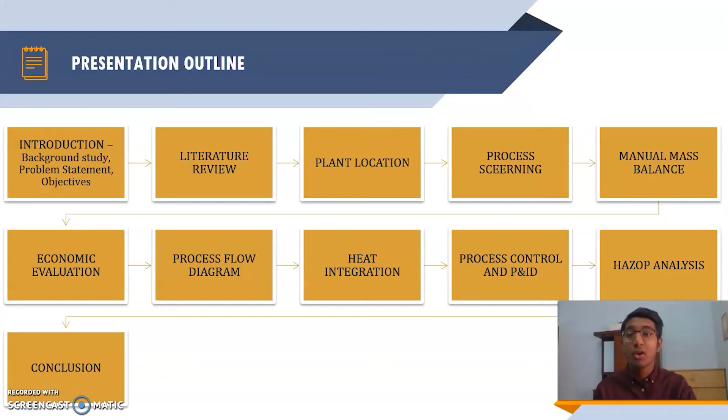Moving on, the title given to us was Title 1: Plant Design for Monetization of Plastic Waste for Chemicals Production. Now moving on to the introduction of this project.

Based on the background study, plastic was produced to reduce the burden of many parties. However, most plastics are not biodegradable. Many companies and industries produce biodegradable plastics, but in general, plastics are still considered non-biodegradable. Due to this, research has been done whereby we can thermochemically convert this plastic waste into commercialized fuel.

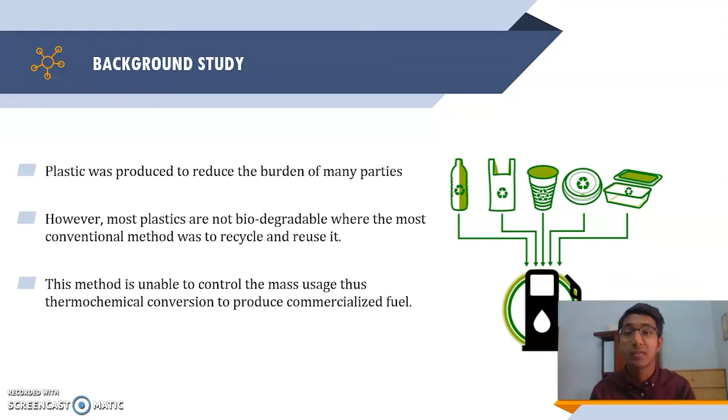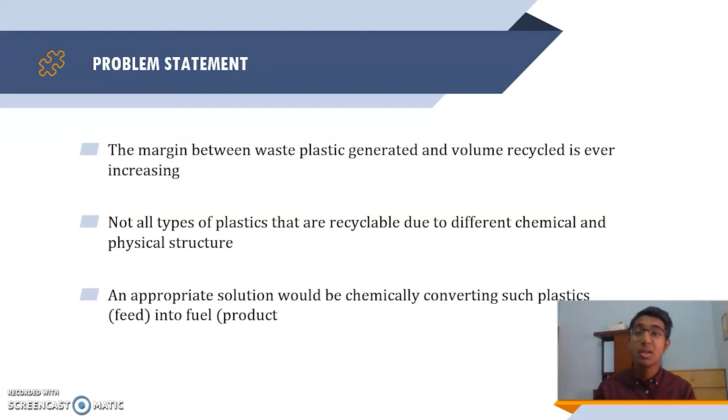Based on our problem statement, the margin between waste plastic generated and the volume recycled is ever increasing. Development in the industry has caused various types of plastics to be produced, with different chemical and physical structures. Due to this, we cannot recycle all types of plastic. Thus, converting plastic into fuel seems like an appropriate solution to this crisis.

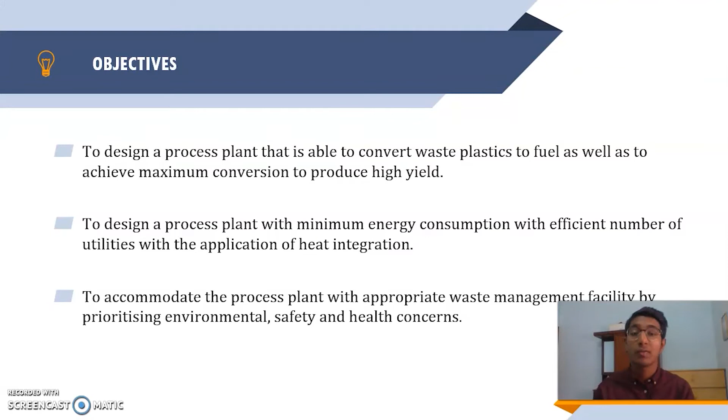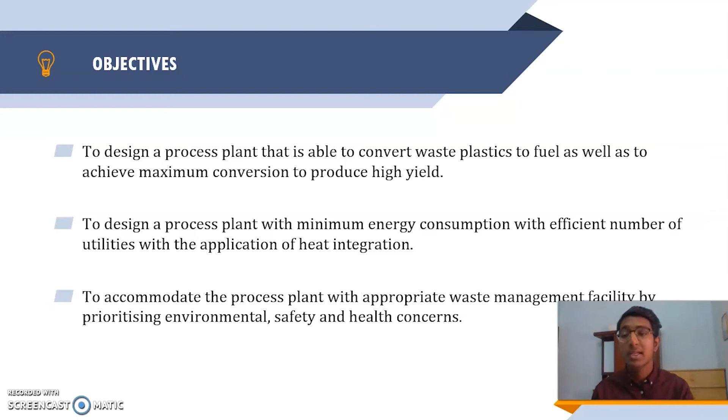The objectives of this project are to design a process plant that is able to convert waste plastics to fuel, as well as to achieve maximum conversion to produce high yield, and also to design a process plant with minimum energy consumption with efficient number of utilities through the application of heat integration, and lastly to accommodate the process plant with appropriate waste management facility by prioritizing environmental, safety and health concerns.

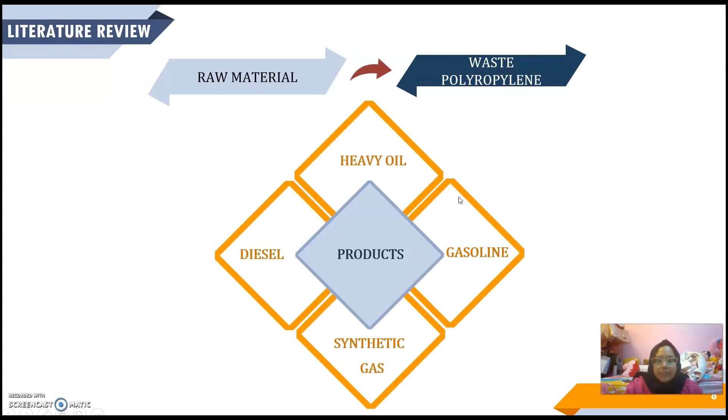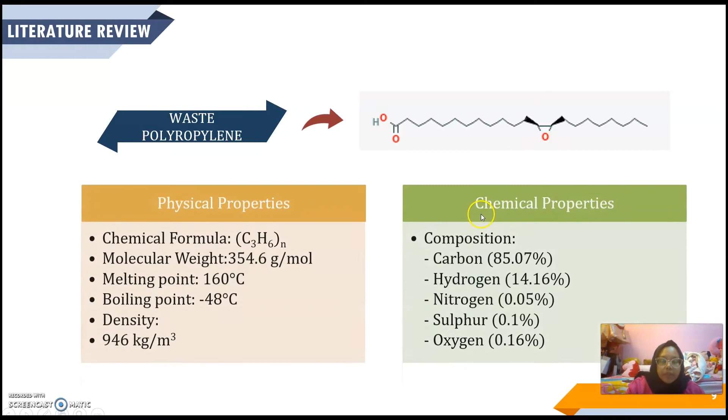I'm Akila. I'm going to present the literature review. The raw material of our pyrolysis plant is waste polypropylene, and the main products are diesel, gasoline, heavy oil, and synthetic gas. Here is the 2D structure of polypropylene, originally made from propene. And here are the physical properties and chemical properties of polypropylene.

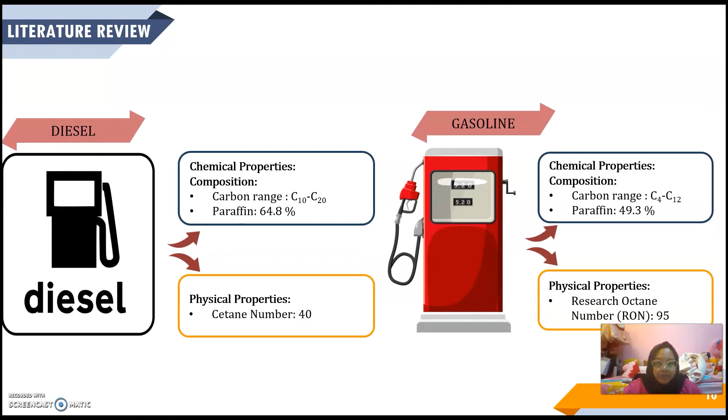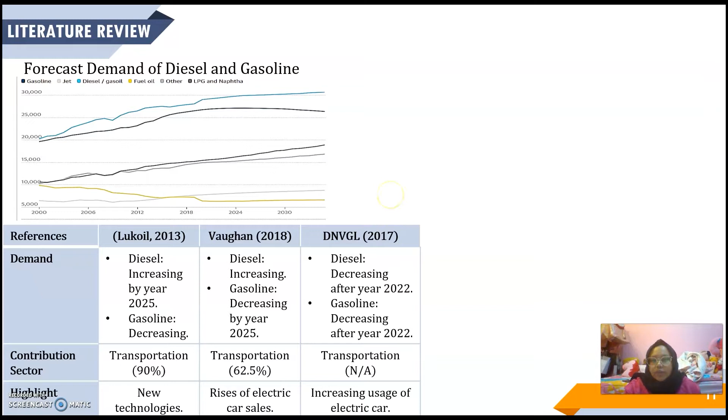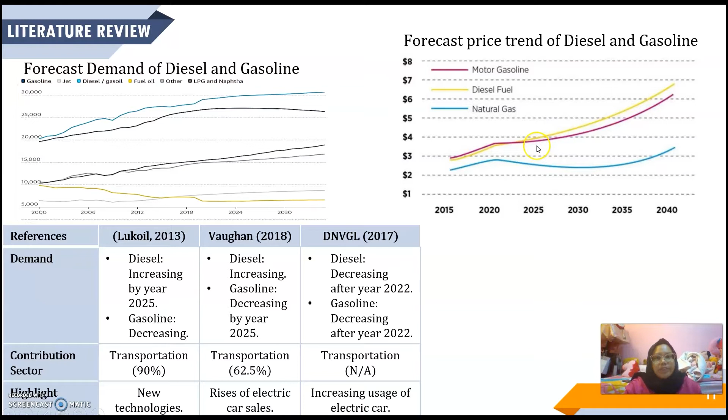Some references expect diesel demand to increase, while some expect gasoline demand to decrease due to new technologies and the rise of electric car sales. As shown by the pink and yellow lines, between year 2020 and 2025, gasoline and diesel are expected to fluctuate a bit, and we can take our current situation as an example, due to the outbreak of coronavirus. China and India are the forecast top consumers of diesel and gasoline.

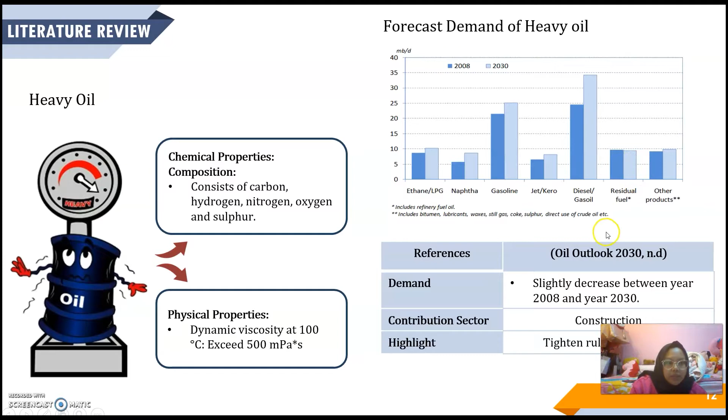Now let's move on to the third main product, which is heavy oil. Here are the chemical properties of heavy oil, and here are the physical properties. It is expected for heavy oil demand to slightly decrease from year 2008 until year 2030 due to tightened emission rules.

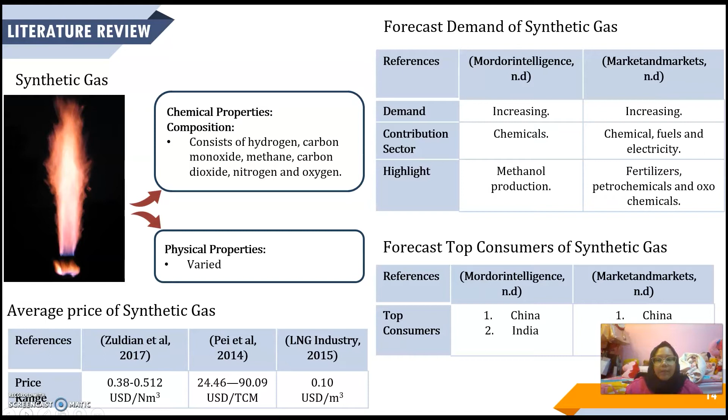Based on this market analysis, even though gasoline and heavy oil are showing a slightly decreasing forecast trend, they still have demand and consumers, so they can be assumed as profitable products. For the plant locations, I'll be explaining based on location options and also ranking factors.

So there are three options that we chose for the locations of our industrial plant, which are Kerteh Terengganu, Shah Alam Selangor, and also Gebeng Pahang.

So the factors that we will be assessing and comparing between these locations are listed in the leftmost column of this table. The average pricing of land per foot is based on what we extracted from a website based on MIDA, the Malaysian Investment Development Authority. TNB electricity tariffs were also extracted from the same website and is standardized for all three states.

Energy availability, on the other hand, electricity will be outsourced as mentioned from TNB, but there are two utility facilities in Kerteh and also Gebeng called Centralized Utility Facility Kerteh and Centralized Utility Facility Gebeng. These facilities supply a certain number of utilities to the nearby industrial plants, and these facilities are based on Petronas.

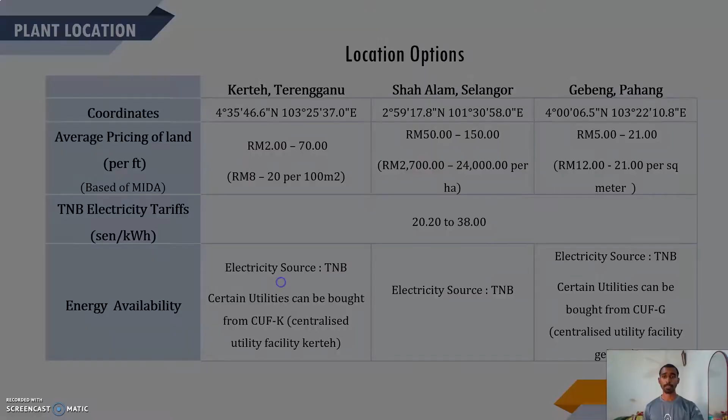The next few factors will be raw materials availability. So for raw materials, we are assuming that we will be outsourcing it from solid waste management facilities based on each state. The next factors are markets, road transportation, and water supply. Transportation is compared by looking at the distance between the location and the nearest transportation hub.

In terms of waste treatment, we have chosen Kualiti Alam as our option. Local community, on the other hand, is where we compare the number of communities, the number of people in the nearby vicinity of the area, and the distance of the nearby local residential area to the location of the plant. Climate, as you can see, is almost similar for all three locations.

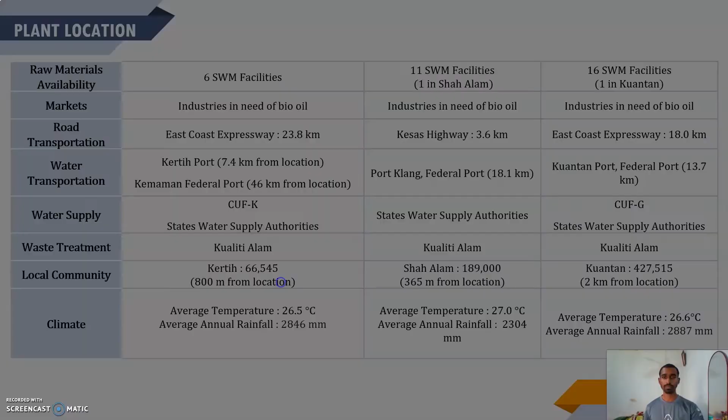So these are the ranking guidelines. Based on the factors I explained earlier, we chose a certain number of factors so that we can rank based on the guidelines shown in this slide. The few factors chosen are land pricing, energy availability, raw materials availability, utilities, road transportation, water transportation, and local community.

So as you can see, for land pricing, the most affordable is ranked highest. For energy availability, raw materials availability, and utilities, we rank it highest with the most number of sources. For road transportation and water transportation, it's the hub that is nearest from the site location.

For local community, we take it as the most ranked. The highest rank is when the location is suitable for heavy industry and the local residential area is quite far from the site location.

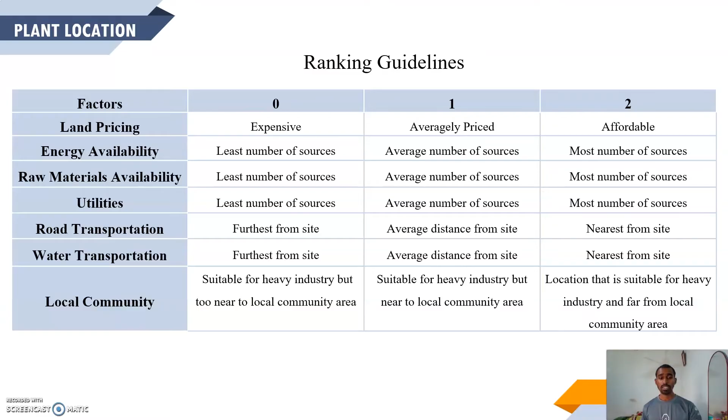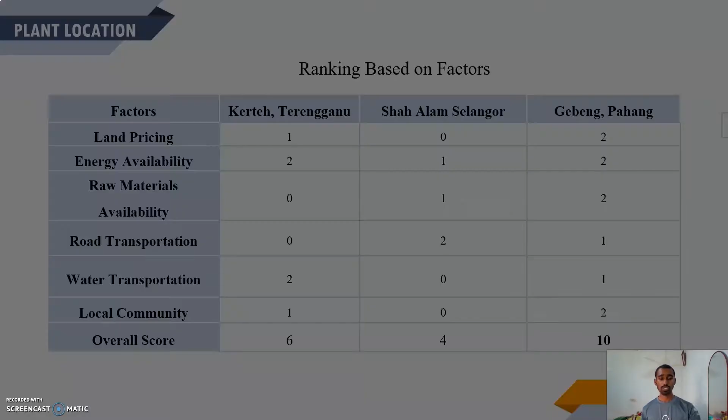My name is Elaine, and today in this section I'm going to talk about the process screening on the conversion of plastic waste to fuel.

So the process of converting plastic waste to fuel is through thermal decomposition. There are two ways: first is pyrolysis, and the next is gasification. In terms of process, pyrolysis occurs in the absence of oxygen, while gasification requires oxygen. In terms of temperature, pyrolysis occurs around 350 to 600 degrees Celsius, while gasification occurs around 800 to 1200 degrees Celsius.

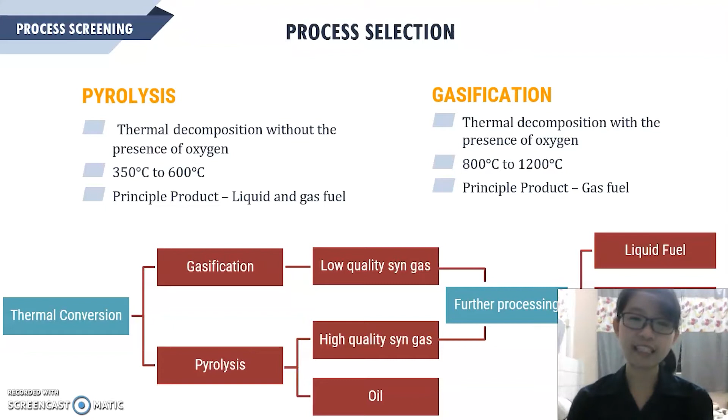And for our project, our main products are liquid gasoline, diesel, heavy oil, and syngas. Therefore, the pyrolysis process was chosen because of the main products, which are the liquid and gaseous fuel, compared to gasification, in which the main product is only gaseous fuel. Other than that, pyrolysis produces higher quality syngas compared to gasification.

So this is our block diagram process flow for the pyrolysis. Over here we have the pre-treatment, in which the polypropylene is dried and crushed into smaller pieces. Then here we have the pyrolysis reactor, which will thermally decompose the polypropylene into hydrocarbon compounds in gaseous form. And this condenser here will condense the hydrocarbon gases into liquid, which is known as bio-oil.

And here we have our hydrotreating reactor, which converts the unsaturated hydrocarbon to saturated hydrocarbon through the reaction of hydrogen in the hydrogen separation section here. Finally, the bio-oil is split into its components, which are gasoline, diesel, heavy oil, and syngas, through the distillation process.

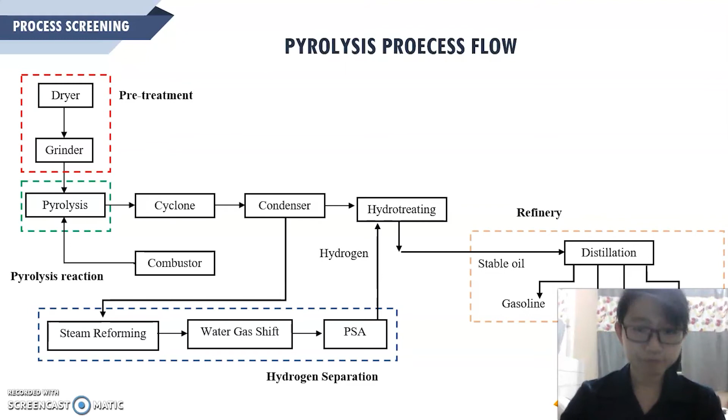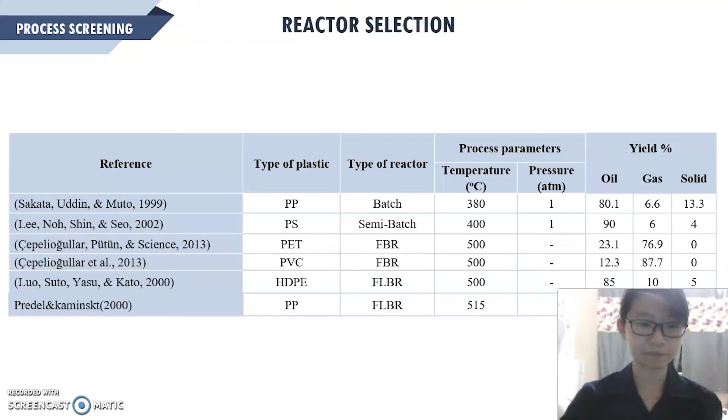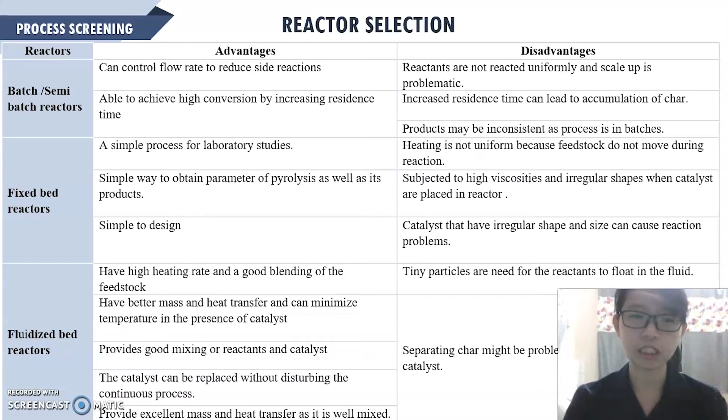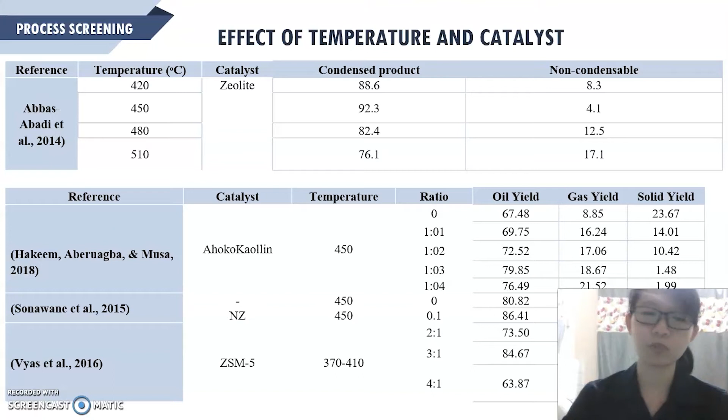So our next part of the process screening is the effect of temperature and catalyst. In terms of temperature, 450 degrees Celsius will provide the highest yield. In terms of catalyst, compared to kaolin, the zeolite catalyst actually provides higher yield because it contains silica and aluminium compound, which is most suitable for the thermal cracking of the polypropylene.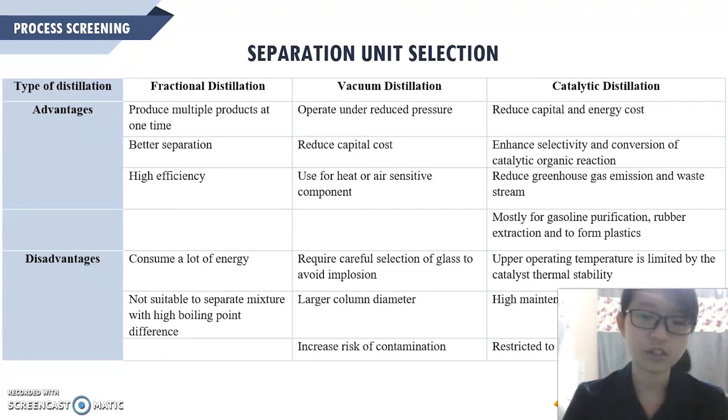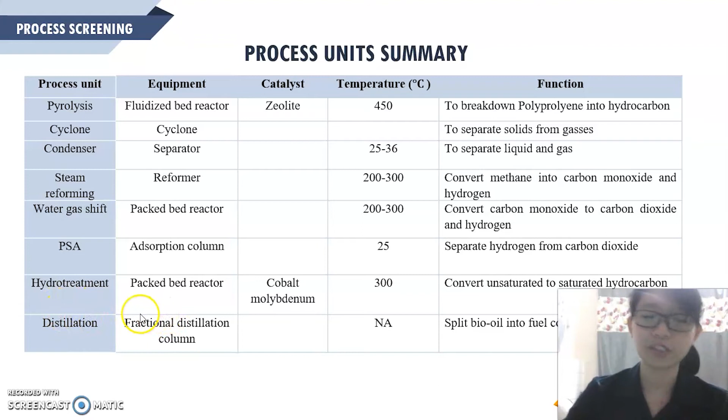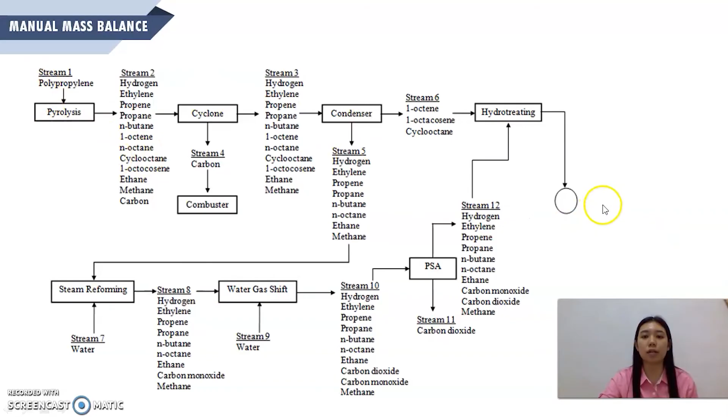As mentioned in the process screening, the polypropylene needs to undergo several processes to obtain our final products. First, the polypropylene needs to undergo pyrolysis reaction to obtain a pyrolysis gas which contains propene, 1-octene, and other components. At the same time, there is a side reaction that converts the 1-octene and hydrogen gas into N-octane.

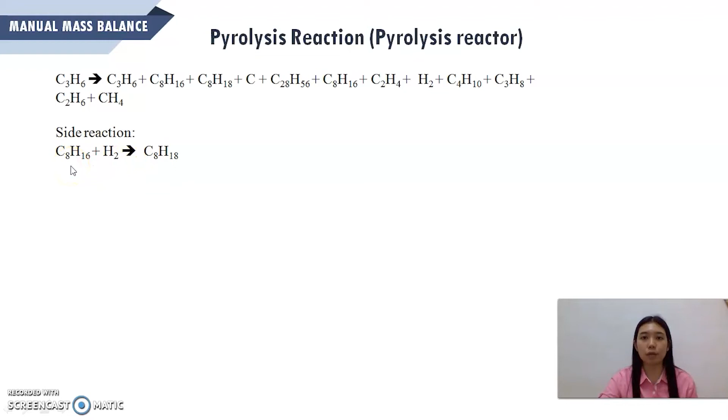Then the pyrolysis gas will enter the cyclone to separate the carbon, which is the solid char, and then enter the condenser to separate the condensable gas and non-condensable gas.

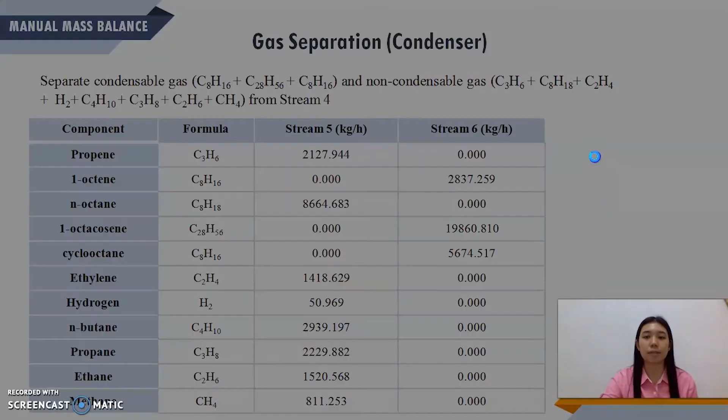The non-condensable gas will undergo steam reforming process to convert methane to carbon monoxide and hydrogen gas, assuming 70% efficiency.

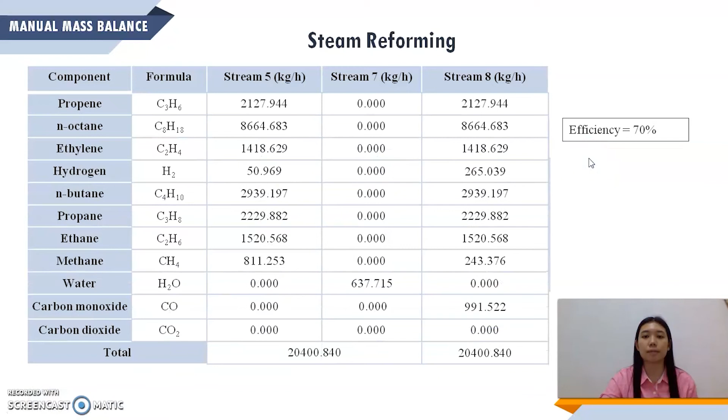Then stream 8 will enter the water gas shift reactor to convert carbon monoxide to carbon dioxide and hydrogen gas, assuming 90% efficiency.

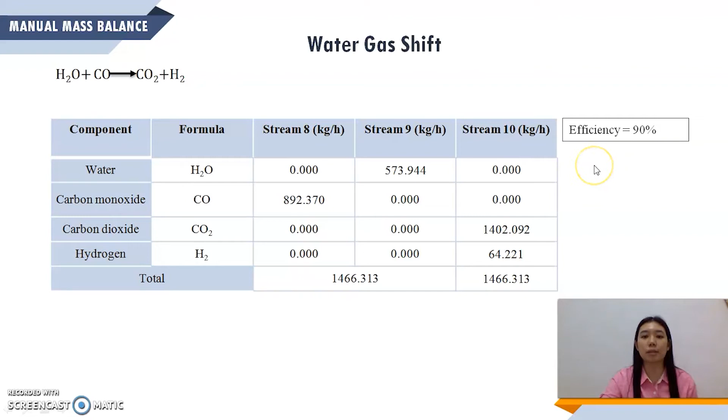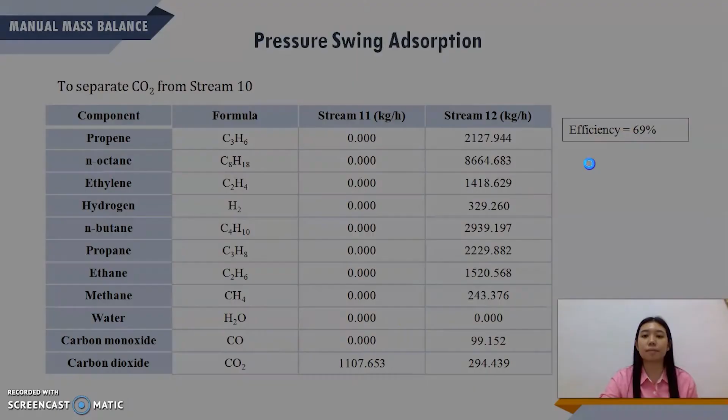Then stream 10 will enter the pressure swing adsorption reactor to separate the carbon dioxide, based on 69% efficiency. Now stream 12 can enter the hydrotreating reactor together with stream 6, which is the condensable gas.

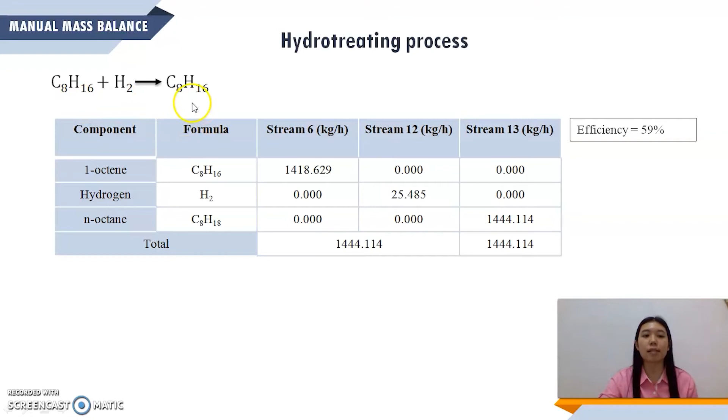This process is important because we need more paraffin and olefin in the final products. So we will convert the 1-octene and hydrogen gas into N-octane. The efficiency is assumed to be 59%.

Now stream 13 will enter the first distillation column to produce stream 14 and stream 15. Since stream 14 will enter the second distillation column to produce gasoline, its composition will mostly be based on this composition: the 1-octene times with 0.074, N-octane times with 0.402, whereas the cyclooctane times with 0.524.

Then stream 14 enters the second distillation column, and the components I mentioned just now will exit at stream 16 as gasoline, whereas the other components will exit at stream 17 as syngas.

Now for stream 15, it enters the third distillation column to produce stream 18 and 19. Since stream 19 will enter the last distillation column to produce diesel and heavy oil, this stream will basically follow the diesel composition. To obtain the diesel composition, we will multiply the cyclooctane by 0.679 to get this value, so that the cyclooctane in stream 19 will be 15.3%, which is the same as the diesel composition.

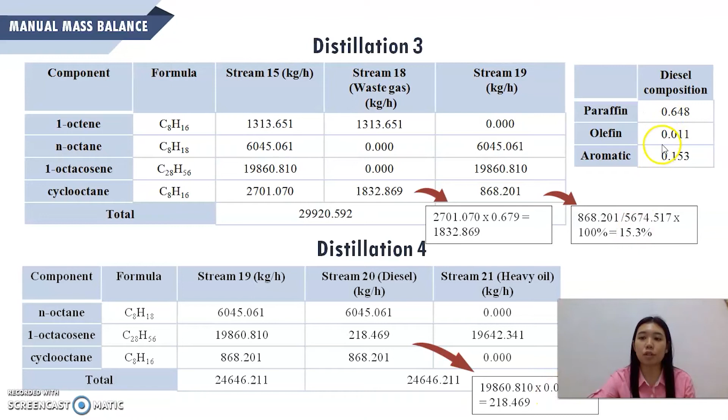Then stream 19 enters the last distillation column, and to get the diesel, we will multiply the 1-octacosene by 0.011, which is the same as the diesel composition, to get our diesel.

So now let us move on to economic evaluation. Economic evaluation needs to be performed in order to investigate the capability of the project in gaining profit. There are several things that need to be calculated, such as total revenue and also total raw materials cost.

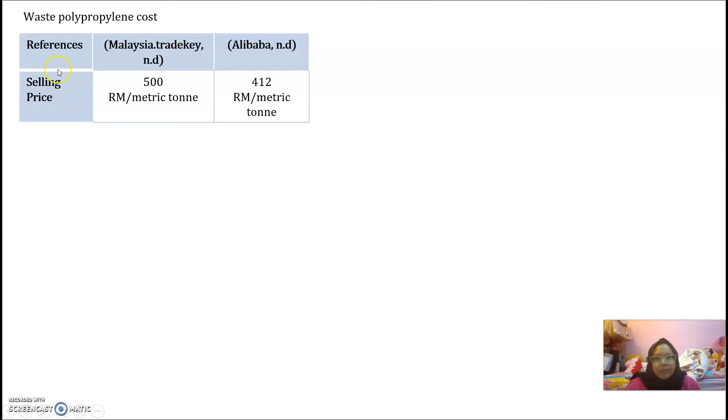Here are the two references for waste polypropylene cost. The maximum price is selected as the raw material cost.

So these are the selling prices of each product. The selling price is determined based on the market analysis of forecast price that I have explained in the literature review part, which is lower than the market price because we need to compete with stable competitors in the market.

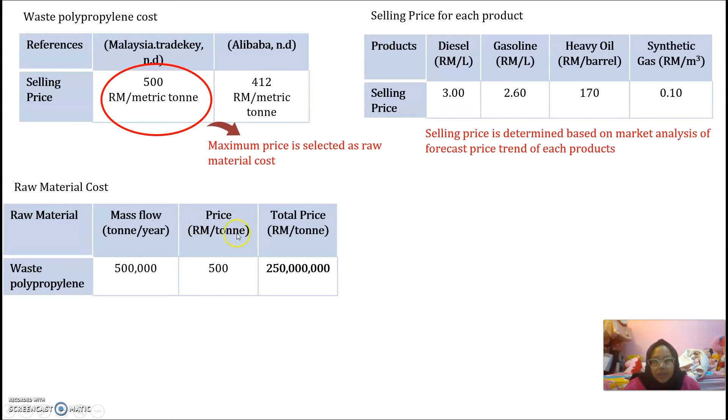So here are the total raw material cost, the mass flow we got from the questions, and the price we refer to the Malaysia.tradekey, and here we got the total price.

Next is the total revenue. Here we got the value from the simulation of HYSYS in terms of kg per hour, then we convert into unit conversion for each product. Then we got the production per year, then we times with the selling price for each product, so we got the total price.

So here the total revenue, after the summation of 4 products of total price. Here, in order to calculate the profit, the total revenue needs to minus with total raw material cost. So here is the value of the total profit, which is in positive value. Thus, this project is economically feasible to be done.

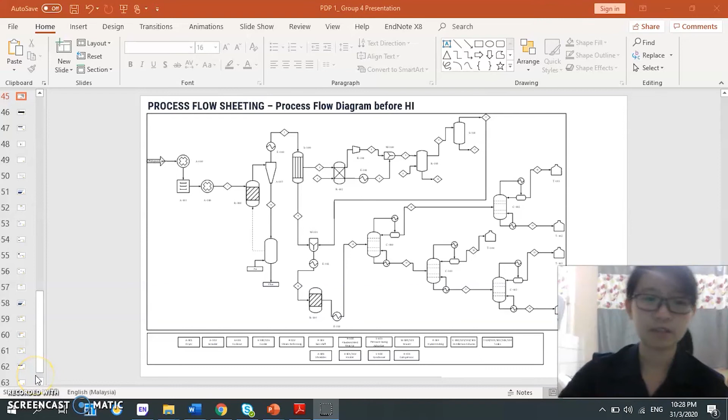This is our process flow diagram for the pyrolysis process. So over here we have the pre-treatment whereby the polypropylene is being dried and crushed into smaller pieces. And this is, as mentioned earlier, our pyrolysis reactor, which converts the polypropylene into the hydrocarbon gases.

So this cyclone actually separates the hydrocarbon from the solid char, in which the char will be used in a combustor to provide energy for the pyrolysis reactor. And over here we have the condenser, which condenses the hydrocarbon gases into condensable gases and non-condensable gases.

For the non-condensable gases, it will go through these processes. The first process is steam reforming, in which the methane here will react with the water to produce carbon monoxide and hydrogen. And over here is the water gas shift reaction, in which the carbon monoxide will react with water to produce carbon dioxide. This process is known as pressure swing adsorption, in which it will separate the hydrogen from the carbon dioxide.

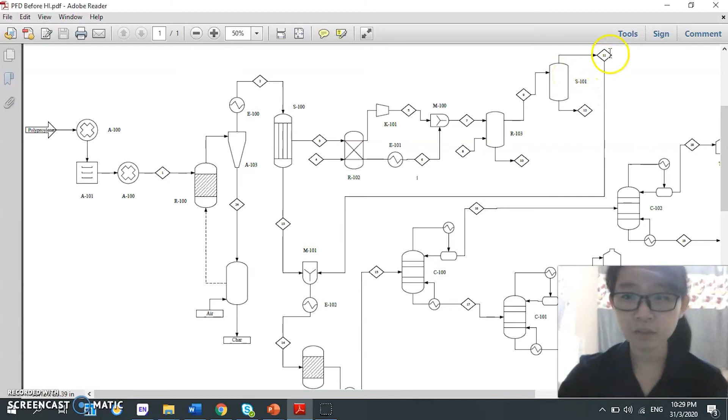So stream 11 here has the hydrogen. This hydrogen will react with the condensable gases in the hydrotreater here, and this hydrotreater will produce the product, which is called stable oil.

So over here we have 4 distillation units. The first distillation unit is to produce the gasoline product and the syngas. The third and fourth distillation columns are to produce the diesel and also the heavy oil fuel component.

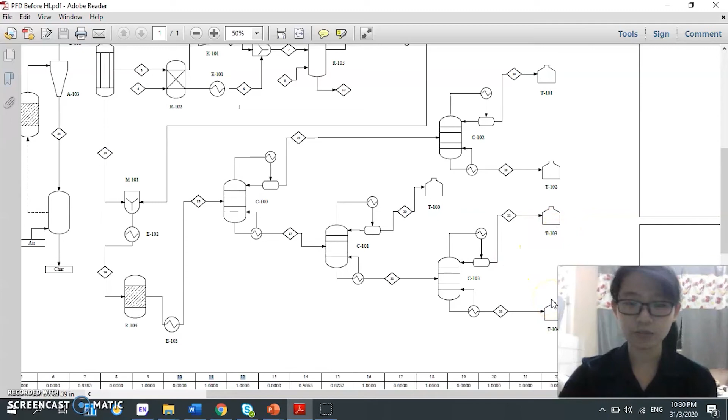Now, I would further explain the heat integration of this project. Heat integration is carried out to reduce the cost of energy by reusing the available heat energy from the process through heat exchangers. In this project, the delta T min was set at 10 degrees Celsius and the pinch temperature was at 1024 degrees Celsius.

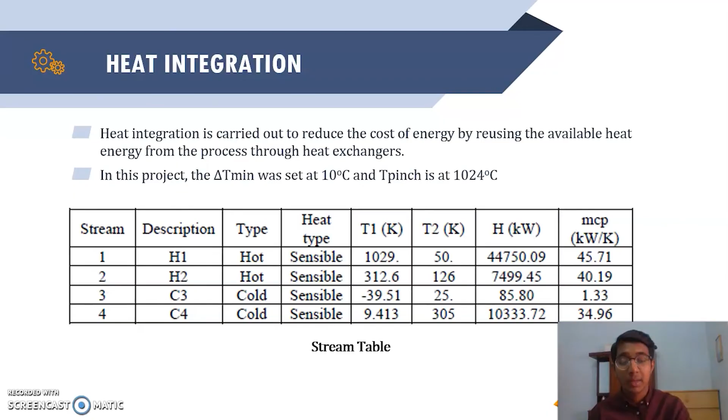Based on our HYSYS, we were able to determine 4 streams, which are 2 hot streams and 2 cold streams. Based on the information collected, we were able to carry out the heat cascade diagram. And based on the heat cascade diagram, we can notice that the QH min equals 0 kilowatts, while the QC min equals 41,820 kilowatts.

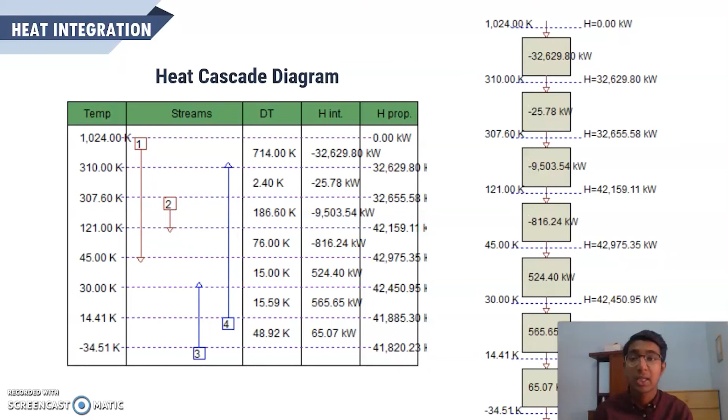After collecting this information, we were able to draw out the heat exchanger network. Based on the diagram, you can notice that we have 3 heat exchangers and only 1 utility, which is a cooler, at a size of 41,820 kilowatts. You can also notice that we do not have any heat exchanger above pinch. Our whole process occurs below pinch.

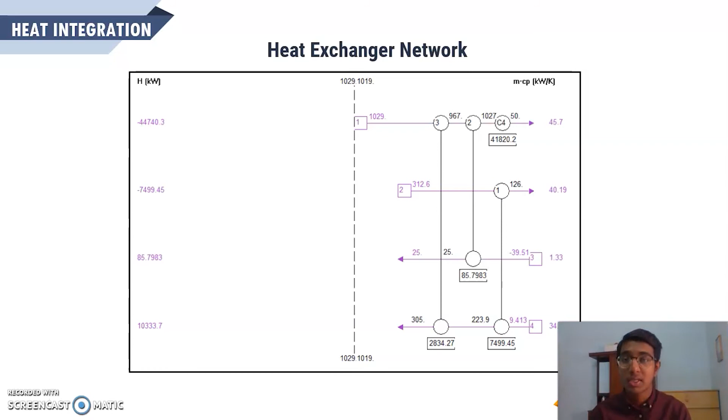In this project, we were able to reduce the number of utilities from 4 to 1 with the aid of heat exchangers. The cost of setting up these heat exchangers may be high, as their capital costs could increase, but in the long run we will be able to save a lot of energy in the process plant. Thus, it will reduce the operating costs in coming time. The overall heat recovered based on the heat integration is 33.27%.

As you can see in the table, previously we had heaters where we would require 10,419 kilowatts and coolers 52,249 kilowatts. After heat integration, we were able to reduce this and save about 20,848 kilowatts. Thus, as a conclusion, based on the heat integration done, we were able to save 33.27% of heat.

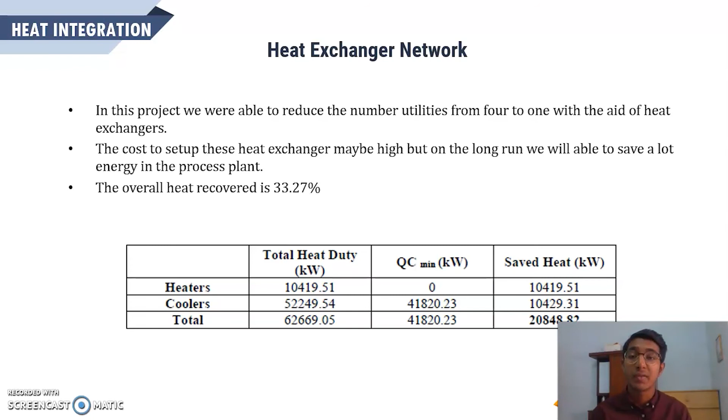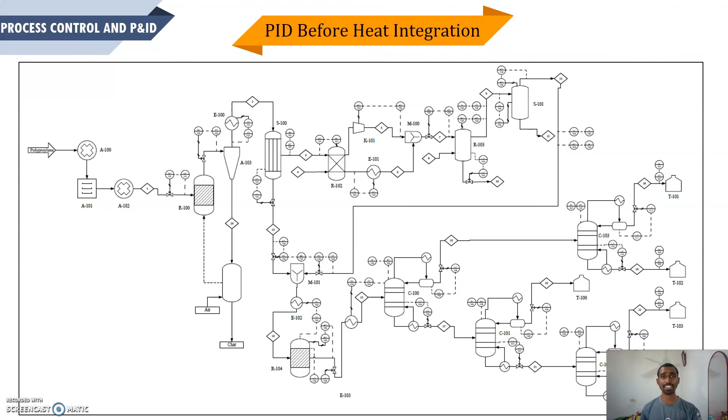So I'll be explaining the process control and P&ID in this industrial plant. This is the P&ID before integrating the heat integration. The control strategies used in this system are feedback control system and also ratio control system. There's only one ratio control system, which I'll explain later on.

I'll be explaining a few examples of units and the types of control variables used, and also the manipulated variables of that unit. The first example will be the hydroprocessing reactor, which has pressure, temperature, and level as its controlled variables.

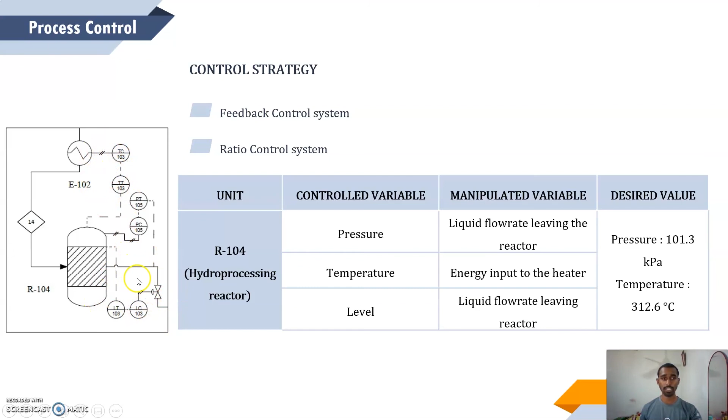In terms of manipulated variable for the pressure, the liquid flow rate is the manipulated variable leaving the reactor as shown here. The temperature will be the energy input to the heater here, and also for the level, the liquid flow rate leaving the reactor. These are the desired values for pressure and temperature.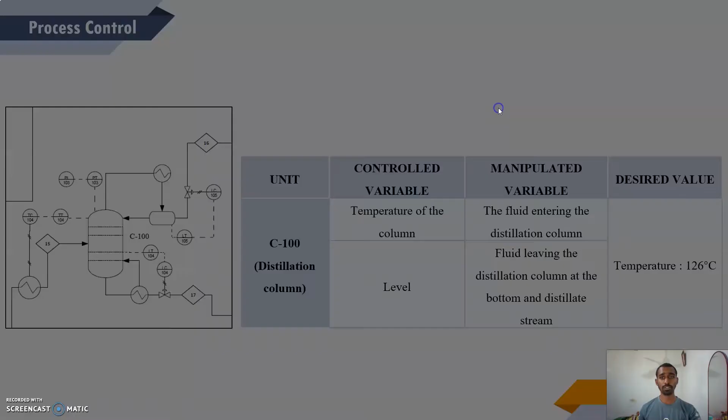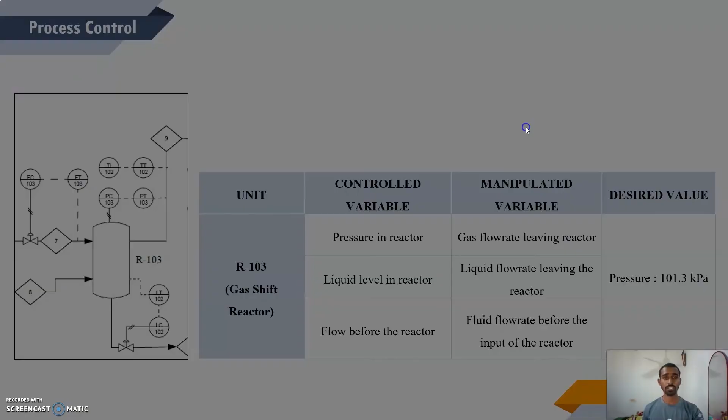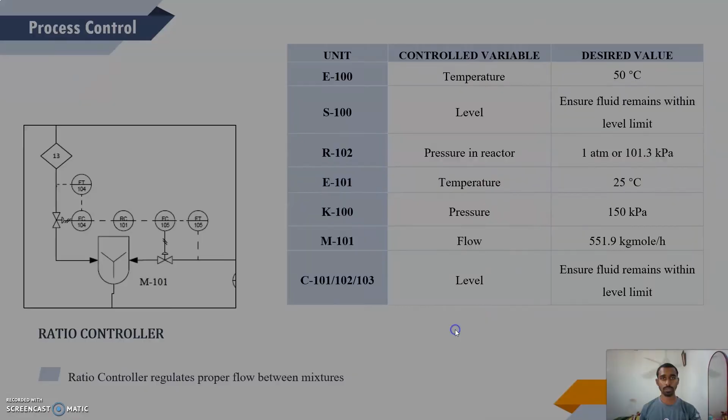Hi, I'm Hui Jing. For the hazard analysis, our first node is the pyrolysis reactor. No flow, less flow, and more flow might occur in this node. The most serious matter is the contaminant due to leakage in the reactor. The pyrolysis gas might react with oxygen and cause an explosion.

For this scenario, our current protection is the flow controller, scheduled maintenance, and standard SOP. For future recommendation, we will install a nitrogen ramp, which can help emergency shut down the plant and control the pressure-vacuum condition in the reactor.

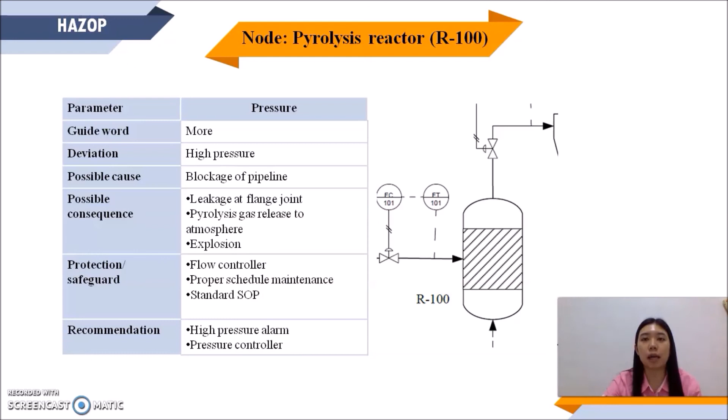Less pressure and high pressure will also occur in this node due to leakage and blockage of the pipeline. For future recommendation, we will install a high pressure alarm, low pressure alarm, and pressure controller.

Our next node is the pyrolysis reactor to the cyclone. In this node, no flow might occur due to failure of the valve to open and blockage of the pipeline. This will disturb the production, and for the worst case, the pyrolysis gas might re-enter the reactor and cause an explosion.

Our current protection is the flow controller, scheduled maintenance, and SOP. For future recommendation, we will try to install a nitrogen ramp and flashback arrestor. The flashback arrestor can help stop the flame from burning back to the reactor.

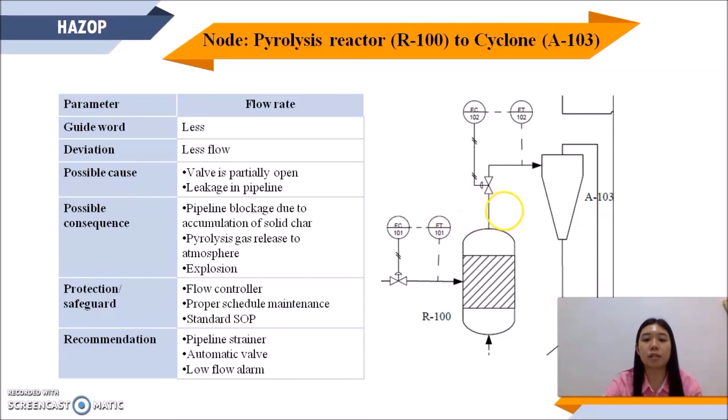Besides, less flow will also occur in this node due to the valve being partially open and leakage in the pipeline. The possible consequence is the pyrolysis gas releasing to the atmosphere and causing explosion from the leakage, and pipeline blockage will occur due to accumulation of the solid char present in the pyrolysis gas.

To solve this problem, we can have a pipeline strainer, automatic valve, and a low flow alarm. The pipeline strainer can help remove the solid char from the flowing gas.

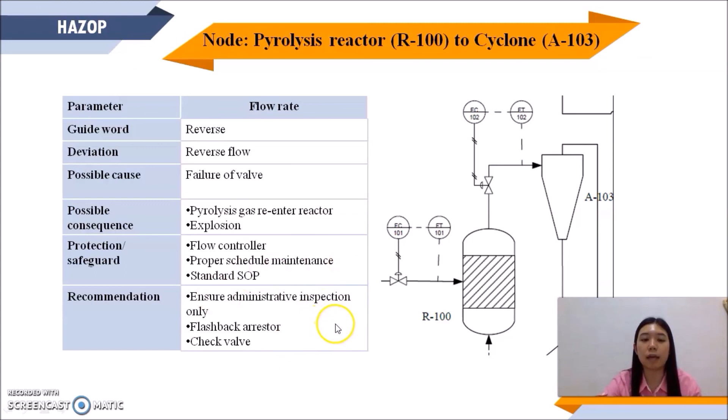Besides, more flow and reverse flow will also occur in this node due to valve malfunction. Both of these will cause the pyrolysis gas to enter the reactor or release to the surroundings and cause explosion. For that, we will try to install a check valve, flashback arrestor, and ensure administrative inspection only.

Our last node is the hydrotreating reactor. No flow, less flow, more flow, and also reverse flow will occur in this node due to valve malfunction, leakage, and blockage of the valve. This will disturb the production and affect the quality of the final products.

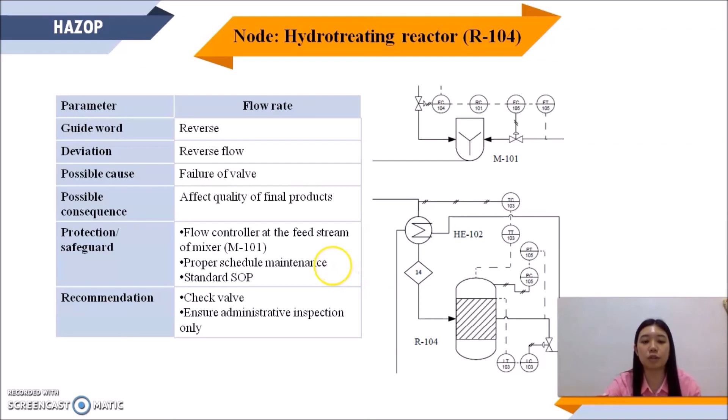So the current protection that we have now is the flow controller at the feed stream of the mixer, scheduled maintenance, and standard SOP. For future recommendation, we will try to install a low flow alarm, high flow alarm, high pressure alarm, check valve, and ensure administrative inspection only.

Lastly, low temperature and high temperature will also occur in this node due to leakage in the reactor and low or high inlet stream temperature. This will cause process upset and incomplete reaction. For future recommendation, we will try to install low and high temperature alarms.